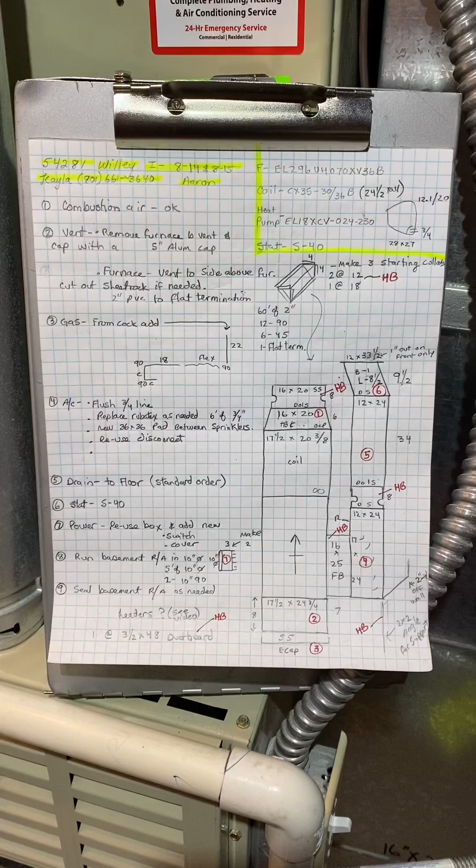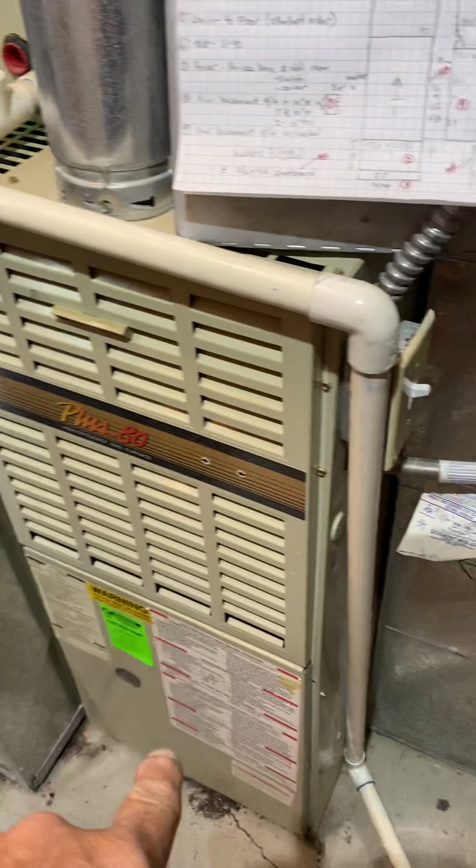Okay, this is on the Willey job, number 54281, installed on 8/14 and 15 by Aaron. So what we're doing is we're switching out this furnace to a 90% furnace, changing the air conditioner and coil and stat, etc.

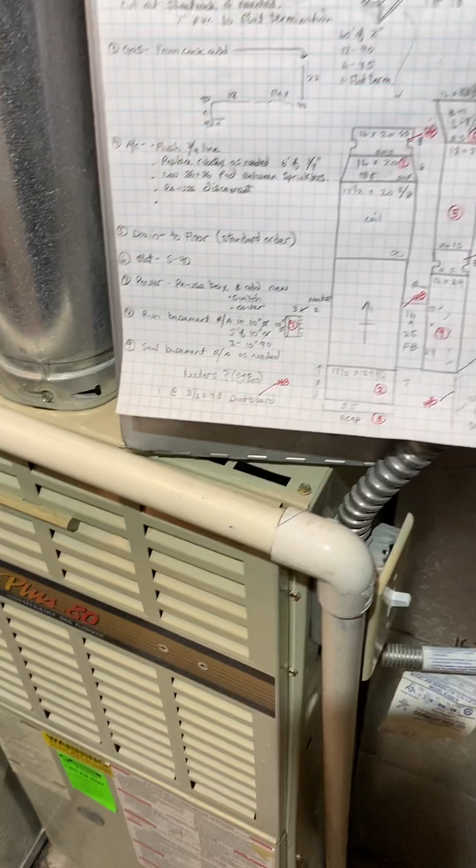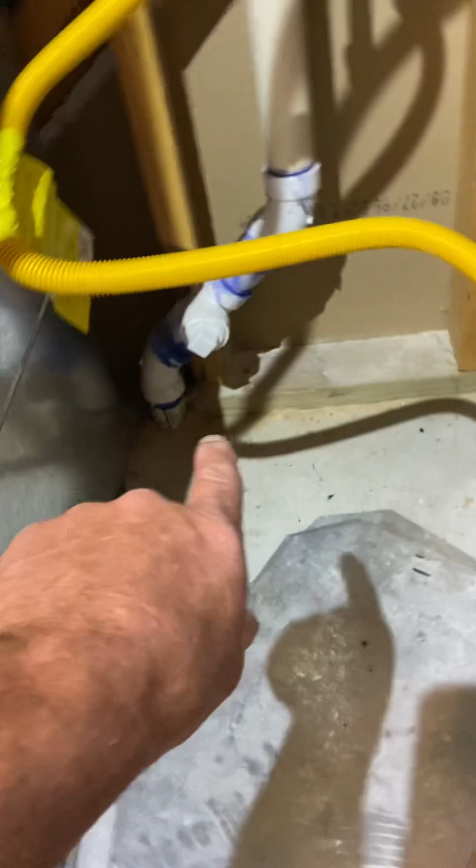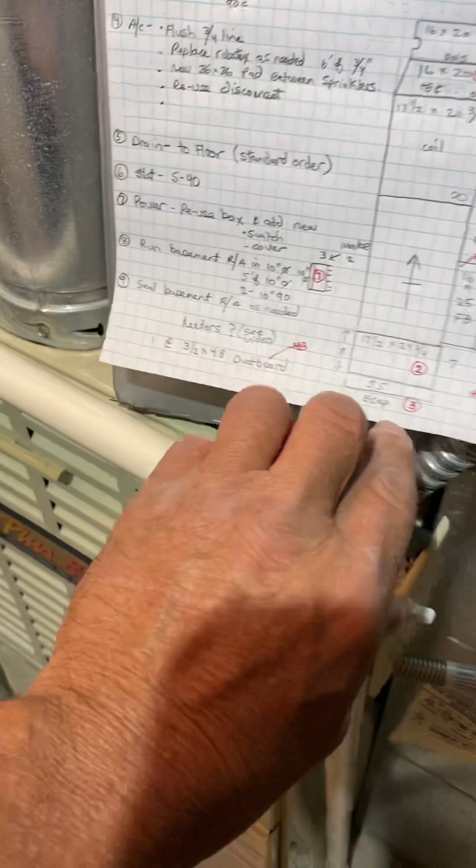So this one was kind of tricky. So we have this drain clean out right here. I don't have enough room to add a filter box and be in front of that. So I had to add an 8-inch piece of duct.

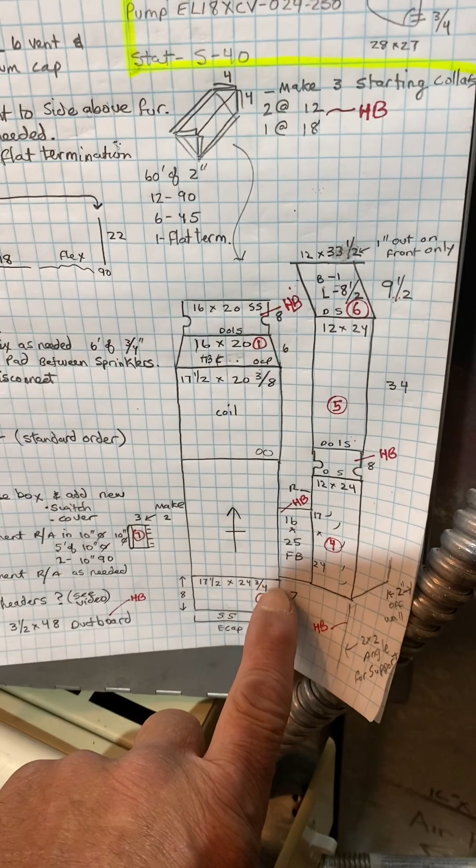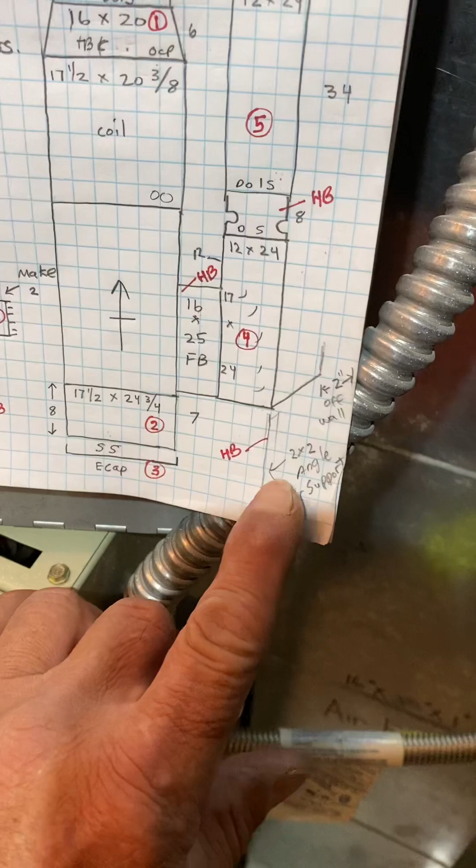So I'm just going to make a box with an end cap and OCP on this side, but you'll leave the bottom in of the furnace there. And then we'll put a 16 by 25 filter there and duct just as it shows. I'll make you a 2x2 angle, and you can make it for a leg here and one on the back.

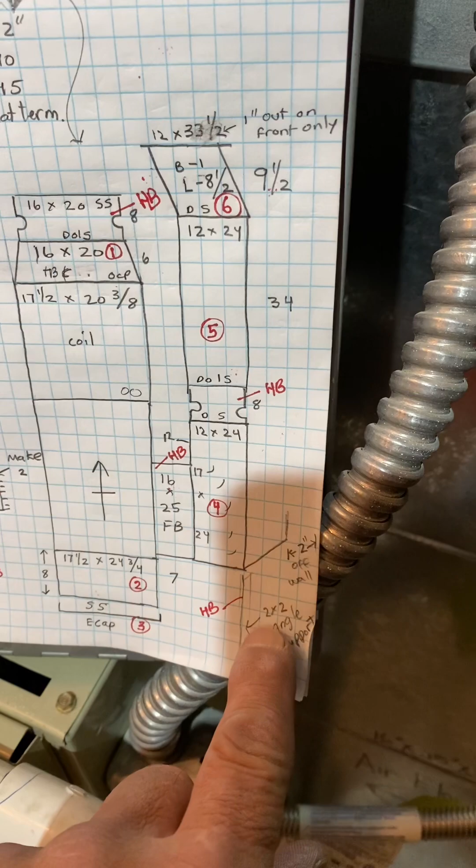Okay, so we'll cut line right here and from side to side. On the supply, I have a cut line right here. So supply just as it shows, furnace, coil, little piece of duct and a canvas.

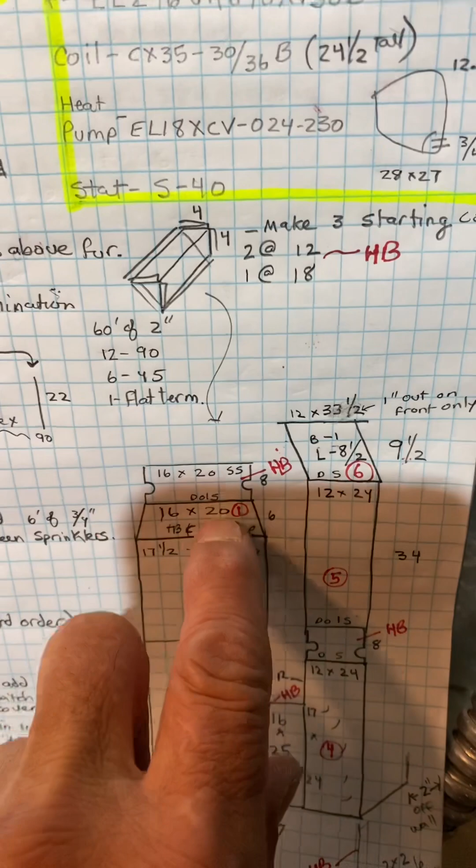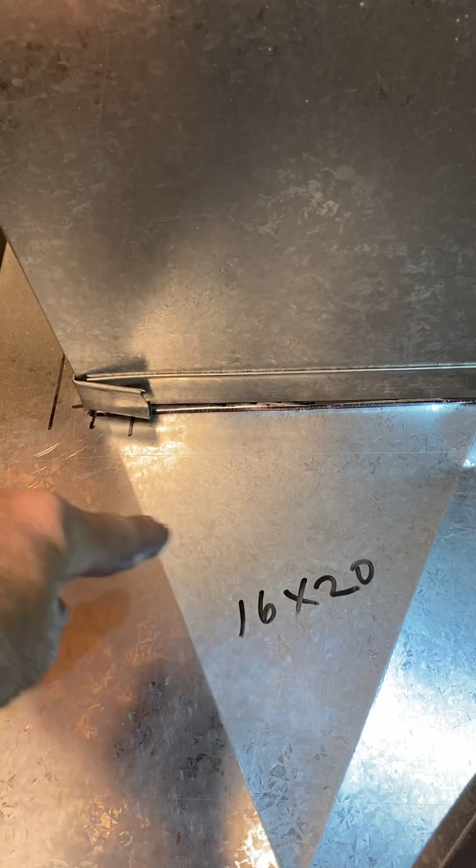I made 3 starting collars. So I just made them 4-inch. I made one for here, and I made one for the back that's this size. I don't even know if there's a duct coming out the back, but I think there is, and if you can get one on, great. If not, don't worry about it. I'm just guessing it's the same size as the one coming out the front.

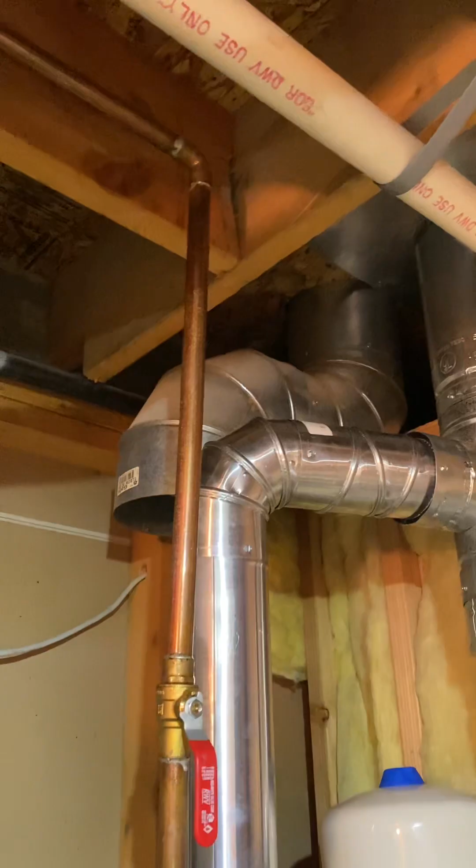Okay. Combustion air is okay, right there. Your vent, remove the furnace B vent, put a 5-inch aluminum cap right there.

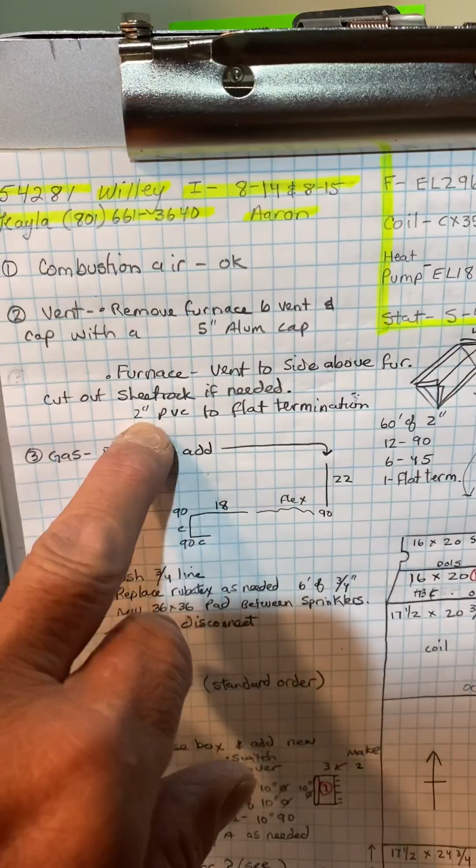On the furnace flues, before I go there, your furnace is going to sit 2 inches off the back 2x4 wall. And all this stuff should go right in front of this PVC and stop before the gas trap. So, just so you know.

Okay, so the furnace flue is going to run 2-inch PVC up and then out. In this room right next to here is a storage room. There's a breaker panel too. But the storage room has a lowered ceiling.

So we're going to run flues above the ceiling. And we're going to have to cut some sheetrock over here to glue on our 90s and go up into the joist and then out to a flat termination on the side.

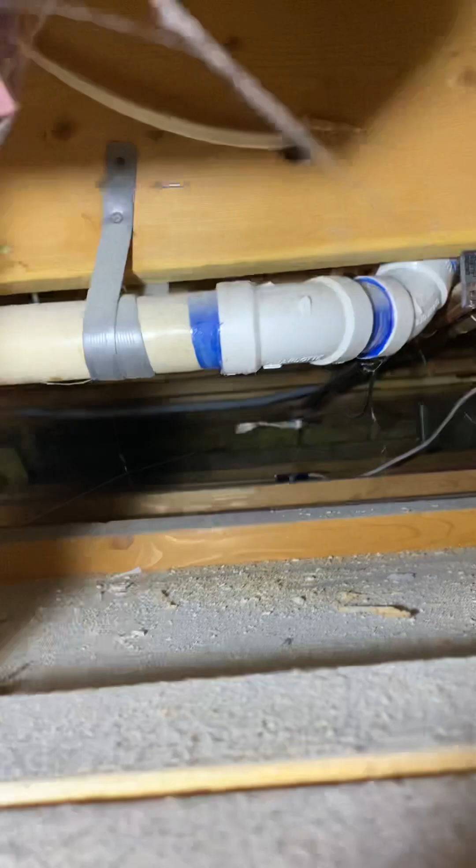She said that Jason, the salesman, said that we would take care of this sheetrock patch. So I will make sure Jason knows about that.

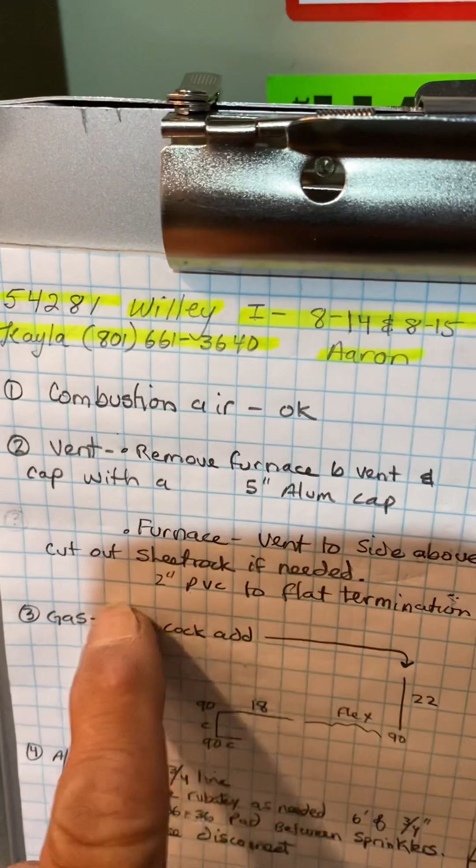Okay, so let's put this up there, just so you have an idea. So that's your space between there. It looks like you're all open. There's a 2-inch PVC through there. Okay.

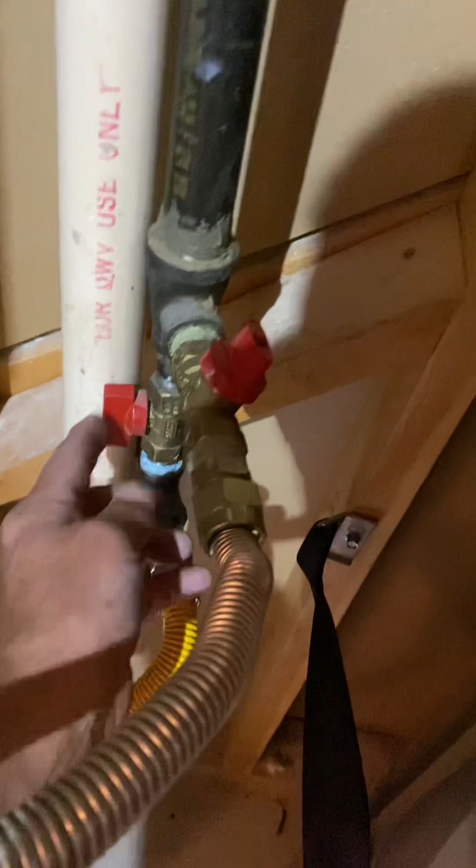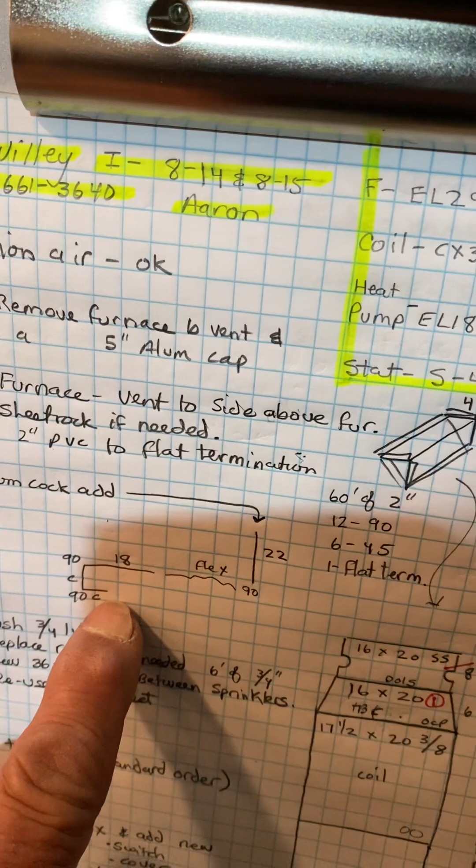Okay, so the gas. So you probably have to turn the water heater cock a little bit so it's straight. Otherwise, it's just on the duct, you know. But this, and turn this straight, from this cock, you're going to add

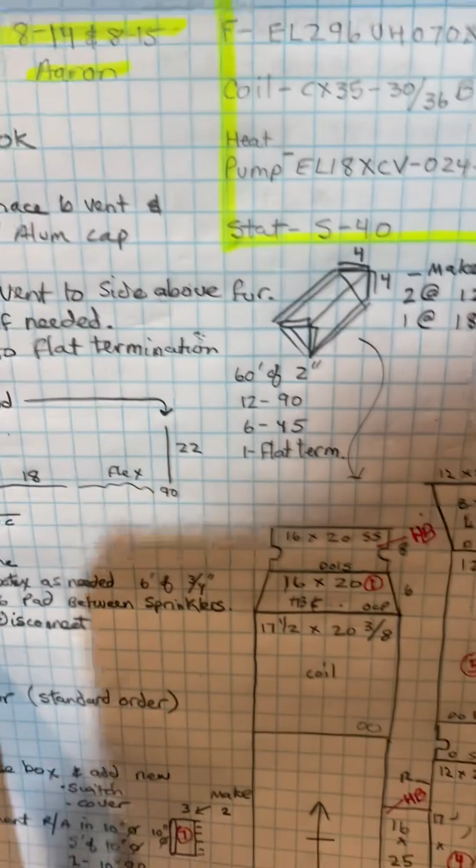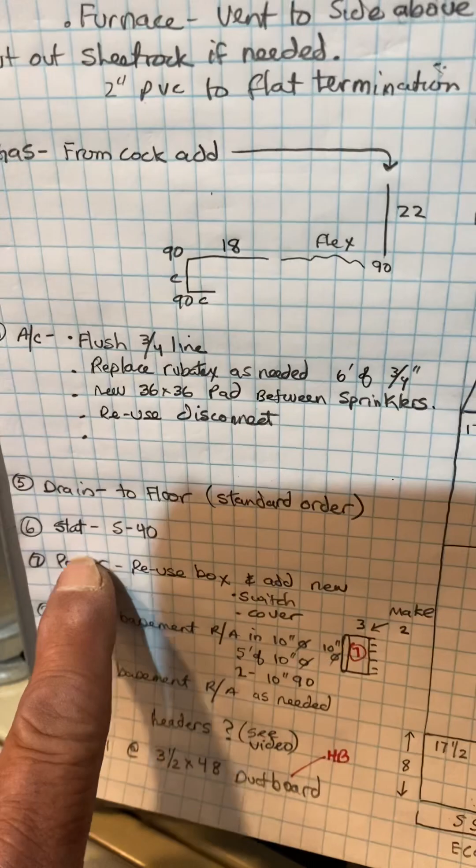22 inch and then a 90, and then just a flex. Coming out of the furnace, I came out with an extra long 18 inch. It'll come out to about here, then you can just flex. They already have a drip leg down here, so we won't need to add another one.

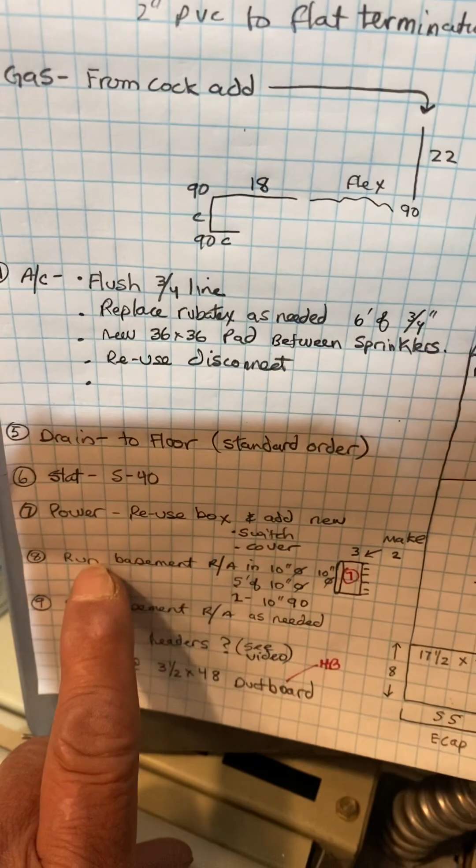Okay. We'll go over the AC in a minute. Drain just to the floor, standard order. Thermostat, you're going to put on a S90. Power, going to reuse the existing box, but add a new switch and cover.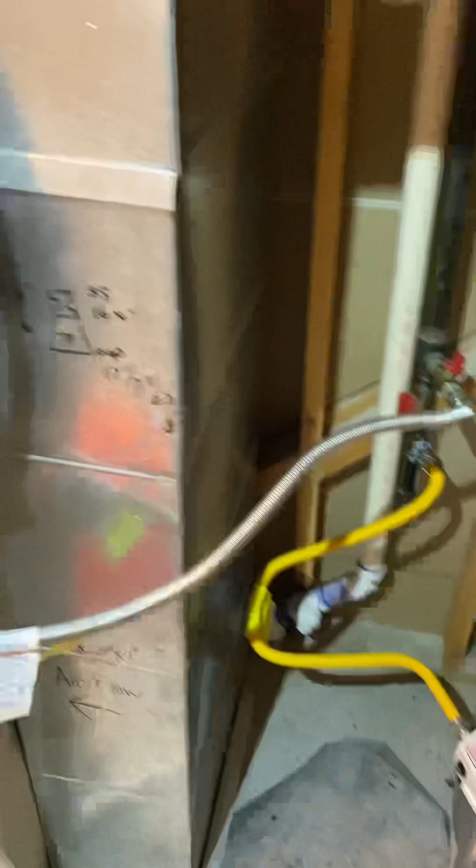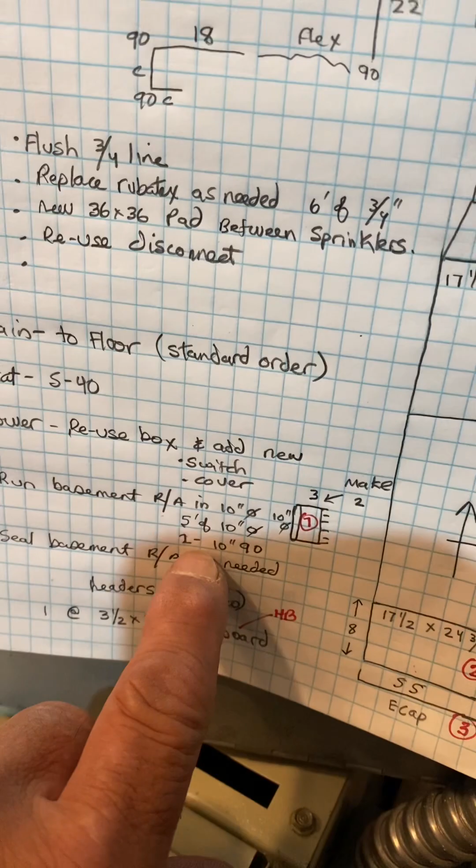Oh, so the basement return air, we're going to take this 9-inch out. We're going to run it in 10-inch, just because that's what our grill can handle, and I'm having doubts about their return air situation. But anyway, yeah, run that in 10-inch.

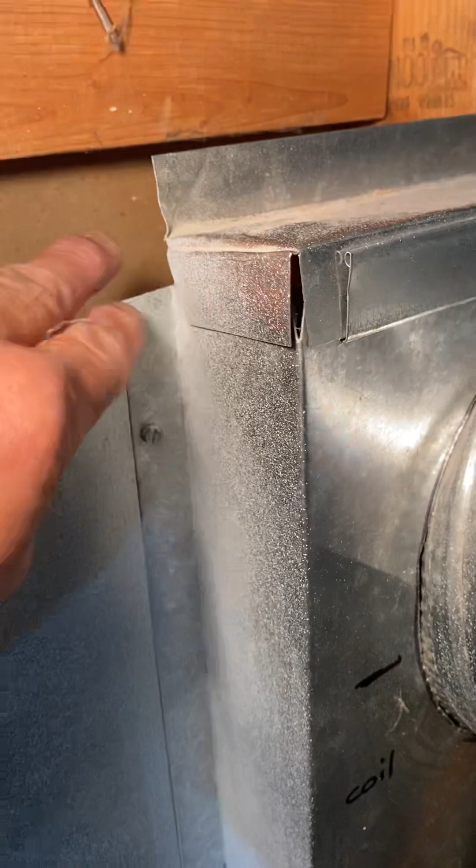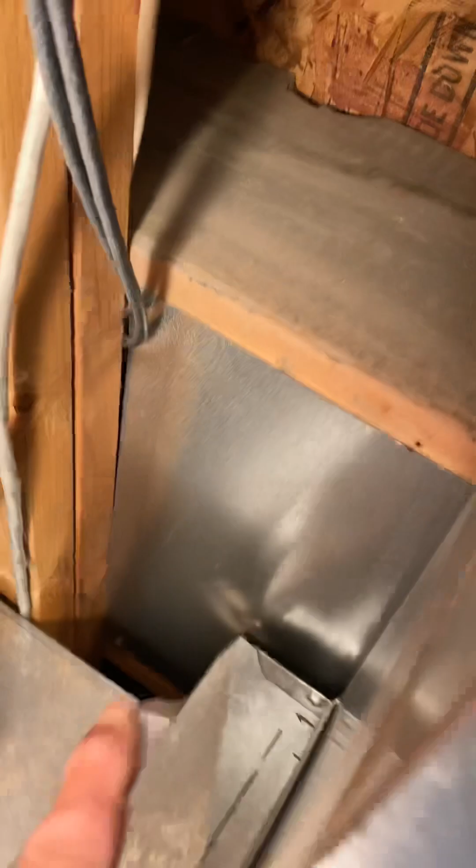So I ordered your 2 starting collar things. 2 10-inch 90s and 5 feet of a 10-inch, just so you can get it high if you need to. Let's see, 1, 2. Anyway, you get the gist.

Okay, so seal the basement return air as needed, and question mark on the headers. So here's what I noticed, that this is all open all the way down. So I gave you a 3.5 by 48 piece of duct board. So header all these off.

And you can use what's left of your angle, put a slip here and use a 2-inch angle right here. And then put duct board, you know, to touch that. So here's what I know.

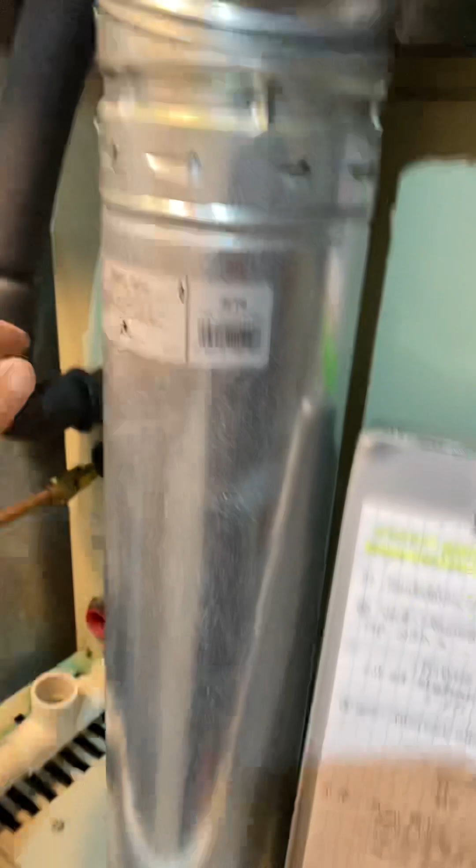They have panning right here. The top of this joist is cut out here. They have no header here. And there's no header on the other side of this panning. There's 2 unbent headers on the floor.

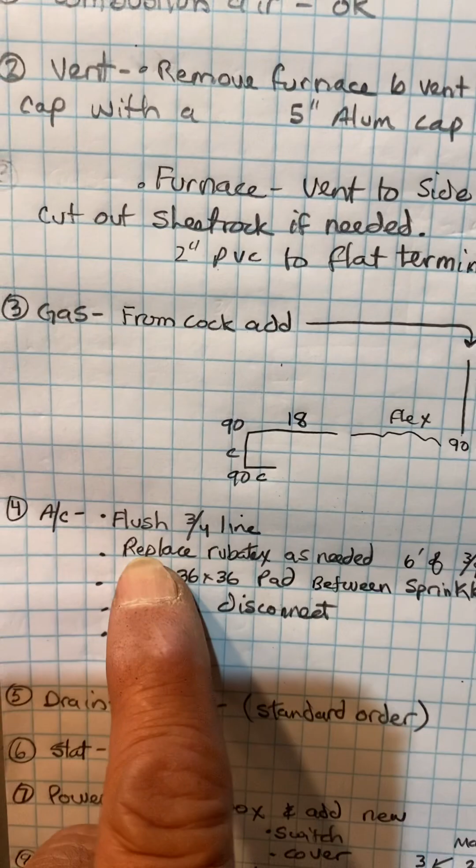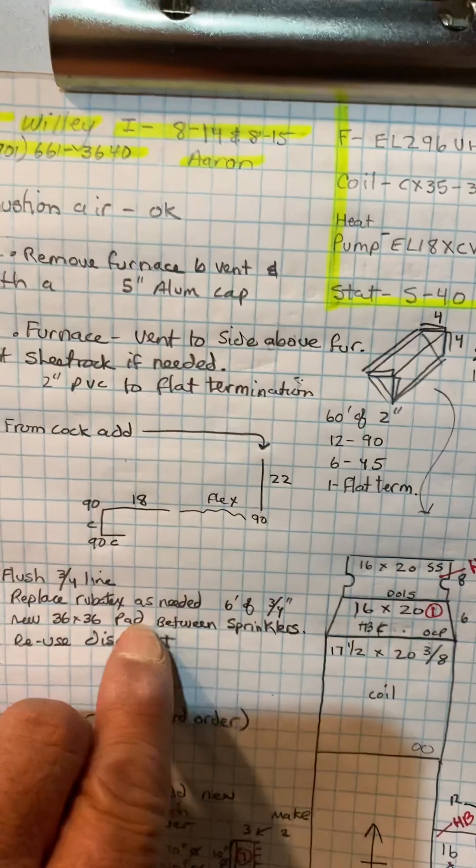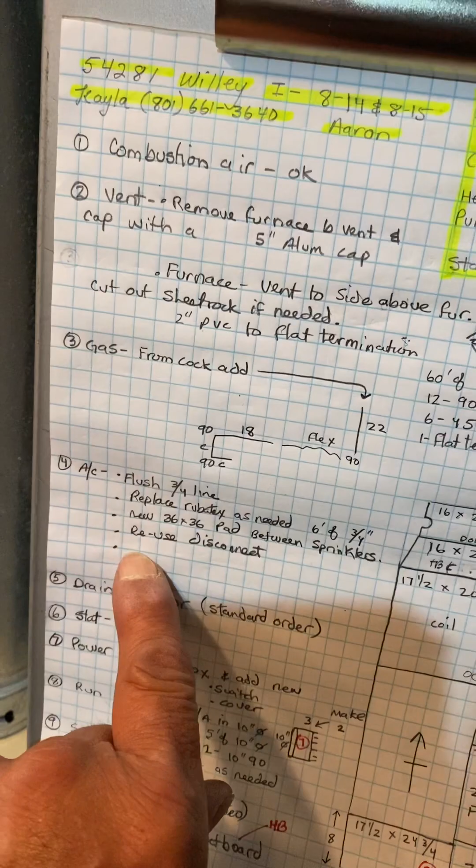Whether there's a return air on top of here, I don't know. So maybe when you cut this open, you can kind of peek in there and see what's going on, or if they just missed the panning, the whole truss spot, or just kind of see what's going on with those headers and where the return is, because we don't want to block it off on that side if they just never panned the joist, you know. So kind of get to that.

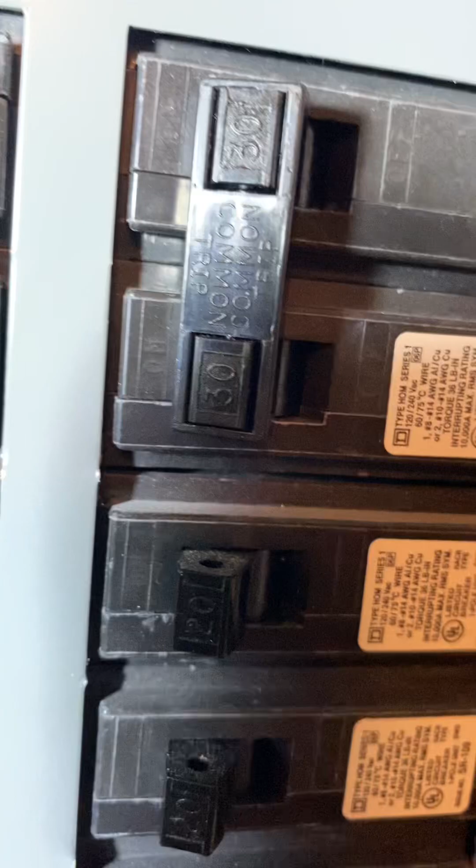So on the AC, gonna flush the line, replace Rubatex as needed. I ordered you 6 feet. The inside Rubatex looks pretty good.

We do have plenty of wires going out to the AC. It's at least 4, probably more. Feels bigger. Flush the 3/4 inch line.

A new 36 by 36 pad. Put it between the sprinklers against the house. I oversized it so we can get it against the house.

Reuse the existing disconnect. The existing 30 amp breaker in the indoor panel is sufficient for what we want. You know what? 20. What was it? 20. I'll have to look at that again. Yep, it's a 30. So we'll leave this breaker. We'll add a 20 amp QO breaker in the outside disconnect. That's it.